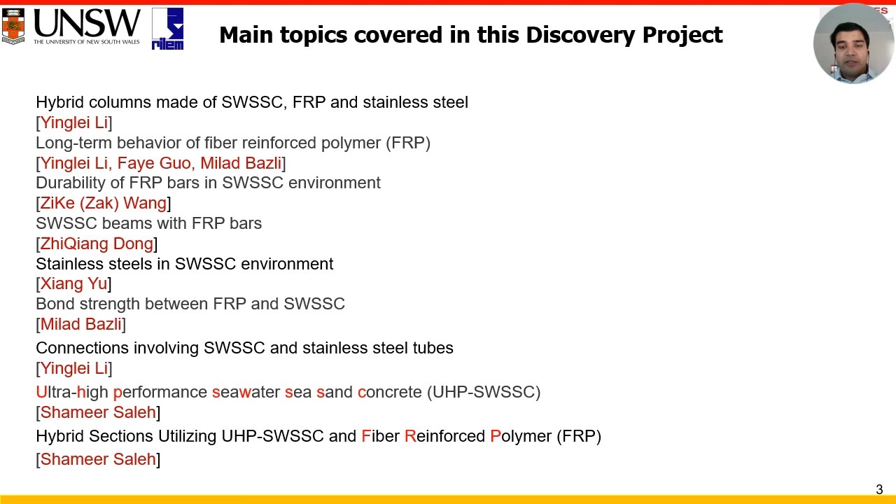There are several main topics covered within this discovery project. However, for today's presentation, I will be focusing on one of the two topics that I am covering within my PhD.

We all know that overproduction and overuse of OPC concrete can lead to scarcity of natural resources such as fine aggregates, freshwater, natural coarse aggregates, and also can be a significant source of carbon dioxide emission. Global cement production in 2021 all over the world was 4.4 billion metric tons, which was more than 3 times than it was in 1995.

At the same time, industrial byproducts such as slag and silica fume are hazardous in nature and they need to be managed properly.

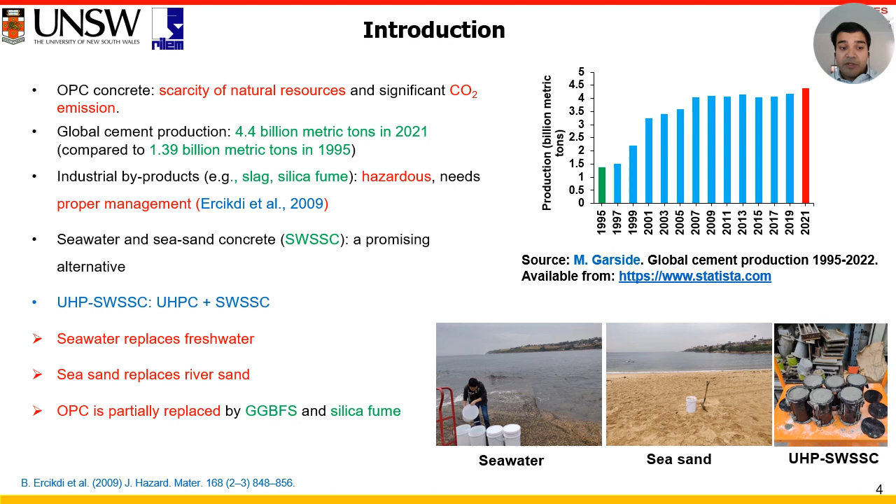Different literatures have established seawater and sea sand concrete as a promising alternative to conventional concrete. In my PhD, I am trying to incorporate marine resources in ultra high performance concrete production. This means seawater will replace freshwater, sea sand will replace river sand, and OPC will be partially replaced by slag and silica.

So the aims of this research are to develop a proper mix of industrial byproduct based low carbon ultra high performance seawater sea sand concrete, which will have the desired physical, mechanical, transport and durability, and also chloride binding properties. And in the second part, I will be trying to incorporate this special type of concrete into FRP based hybrid and composite structures.

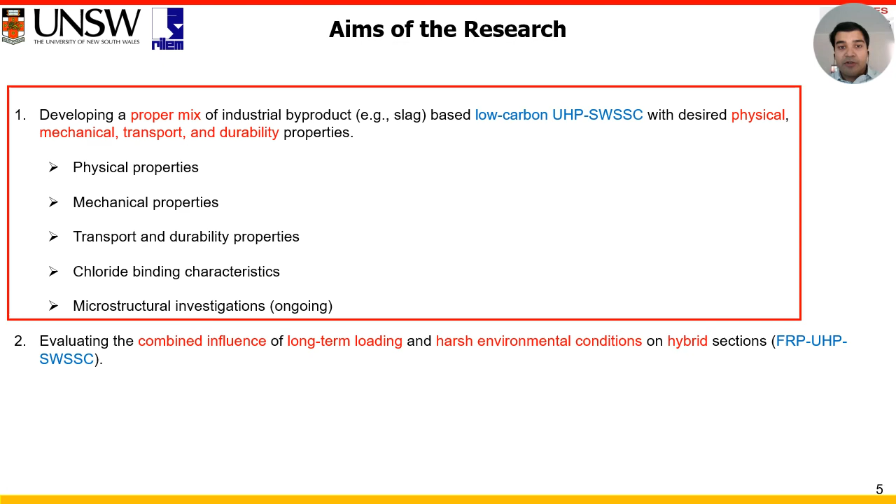I will be evaluating the combined influence of long-term loading and harsh marine exposure conditions to these type of structures. However, for this presentation, I will only be focusing on the first aim of my PhD research.

So, we have developed several mixes in the lab, the parameters being replacement of OPC up to 62.5% by slag and silica fume, different sources of aggregate, and water to binder ratio. However, to keep things simpler, in this presentation, we will only evaluate 4 mixes.

3 of them are seawater sea sand ultra high performance concrete. Number 1, 100% OPC based control mix. Number 2, OPC and slag based binary mix. Number 3, OPC slag silica fume based ternary mix.

And for comparison purposes, we will also discuss one conventional ultra high performance mix that is developed from natural water and natural river sand.

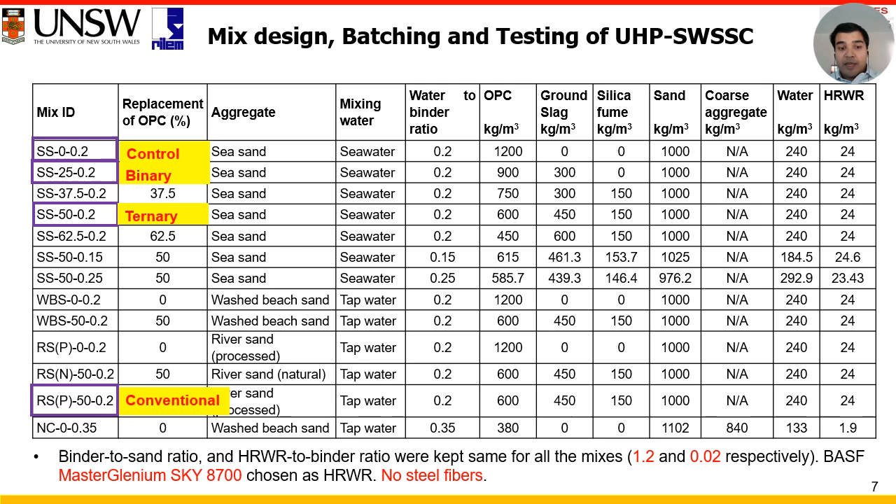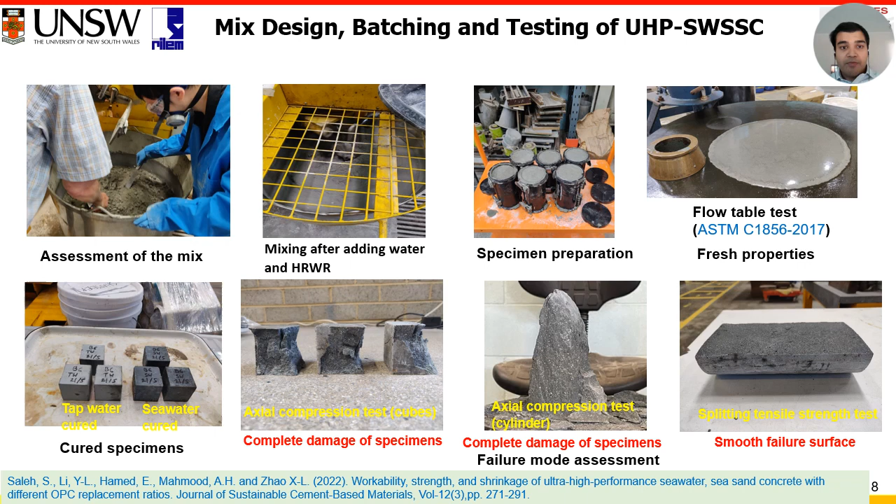Now the effects on the compressive strength. We have found that addition of SCMs can significantly lower the early age strength up to 3 days. However, after 28 days and beyond, the long-term strength will surpass the control strength. This is primarily because of the high pozzolanic reactivity nature of silica fume and its filler effect, which will improve the particle packing density.

When seawater was used in mixing, it had a positive effect, especially in the early age. However, when the concrete specimens were exposed to seawater for a long time, it had some negative effect.

This is because the high chloride content in seawater can accelerate the hydration reaction, especially in the early age of concrete. It can block the concrete pores and increases the initial strength gain.

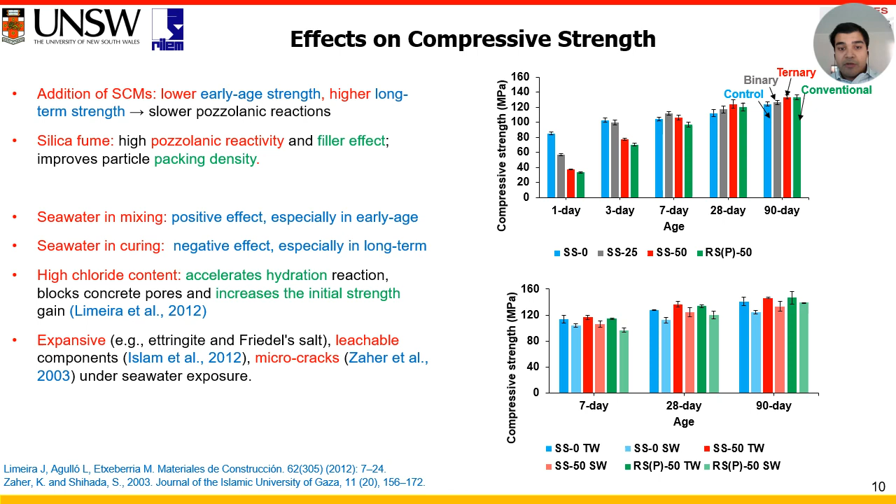However, when concrete is exposed to seawater for a long time, expansive and leachable components form, and also it can create micro cracks on the concrete which can deteriorate the compressive strengths over the long term.

To complement our mechanical test, we performed heat of hydration test and found that seawater indeed accelerates the cement hydration. Use of seawater not only increases the heat flow but also the acceleration peak has been shifted by 6 to 8 hours, which is an indication that seawater accelerates the pozzolanic reaction.

At the same time, use of over 50% SCM can significantly increase the cumulative heat, especially because of the filler effect and production of extra nucleation sites.

However, it was interesting to see that the seawater generated mixes produced more heat in between 12 to 30 hours. However, after 72 hours, the seawater mixed concrete produced lesser heat compared to the controlled tap water based mix, which indicates the early age strength improvement of seawater and the later age strength decrease by using seawater.

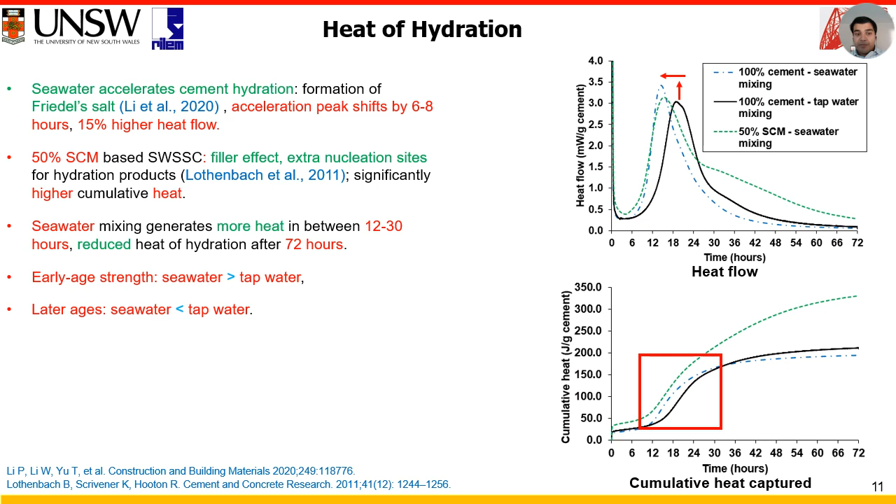Next, moving on to the transportation properties, we have found that the effects of SCMs were prominent in water absorption and volume of permeable void tests, as SCMs produce more CSH, which means more refinement to the pore structure.

However, it was also found that use of only slag does not significantly enhance the transport properties, probably because of their slower pozzolanic reactions.

When marine UHPC was compared to conventional UHPC, we found that marine UHPC generated superior transport properties at earlier age, however slightly inferior after long term, which is because the calcium chloride present in seawater can accelerate the early age hydration.

And after long term exposure in seawater, it can reduce the polymerization of CSH and thereby degrading the transportation properties. Also, the AFM phases within the concrete can bind with the free chloride and form Friedel salt, which can physically block the pores, which we will discuss in detail later.

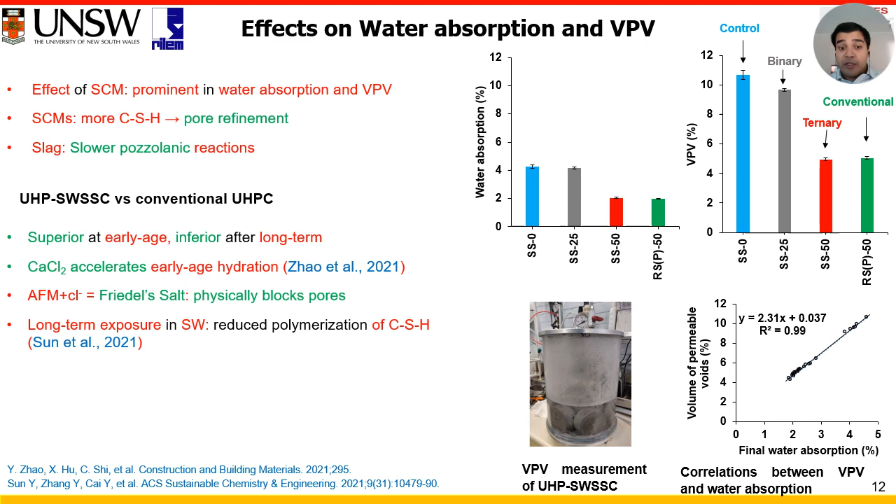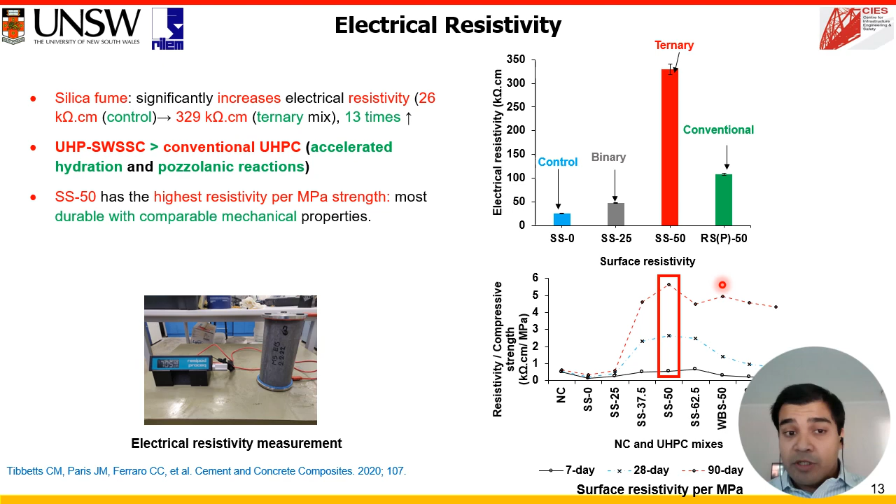We evaluated the resistivity per megapascal compressive strength and found that 50% substitution of OPC by SCM in marine UHPC produces the highest resistivity per megapascal compressive strength, meaning this is the most durable concrete with comparable mechanical properties.

Now, an important part for marine concrete is the chloride migration into it, and we found that the utilization of slag and silica fume in the ternary marine UHPC significantly improves the chloride penetration resistance. Compared to conventional UHPC, the chloride penetration resistance of marine UHPC is much higher.

We can also see this from the rapid chloride migration test that almost three-quarters of the depth has been penetrated by chloride in the control mix, whereas in the 50% SCM based ternary mix we barely see any chloride front.

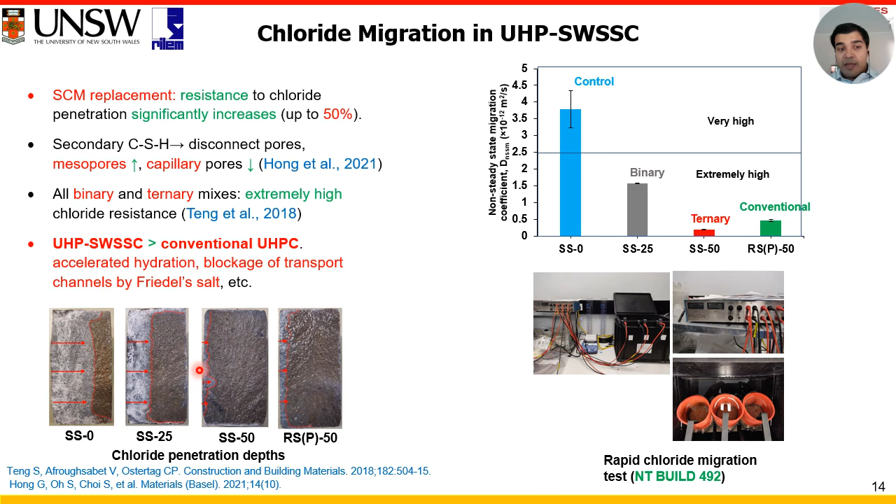Now, moving on to chloride binding, we know that chloride in concrete can be bound in two major ways: one is the chemical binding by formation of Friedel salt, and another is the physical adsorption within the hydration products.

Now, in our concrete, we have two types of chloride. One is already available from the mixing seawater and sea sand, called the internally available chloride.

We found that internal chloride binding capacity was highest in the OPC slag binary mix, followed by the control mix, and lowest in the silica fume based ternary mix, which is corroborated by literature suggesting slag can increase chloride binding capacity. However, inclusion of silica fume can significantly decrease chloride binding, but as silica fume produces more secondary CSH, there is a chance that physical binding can improve.

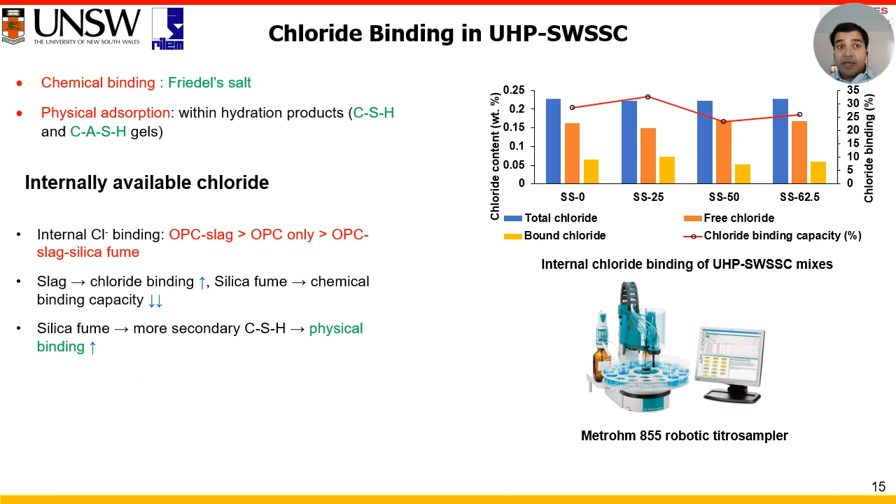So we evaluated the chloride profiles of all types of mixes and found that marine UHPC and conventional UHPC provide very similar and comparable chloride profiles, and the binding capacities of external chloride from marine environment exposure fall within a narrow range of 30 to 36% for all mix types. This means that although we used silica fume, it did not significantly reduce the external chloride binding capacity, suggesting that physical binding governs within the microstructure in our mixes.

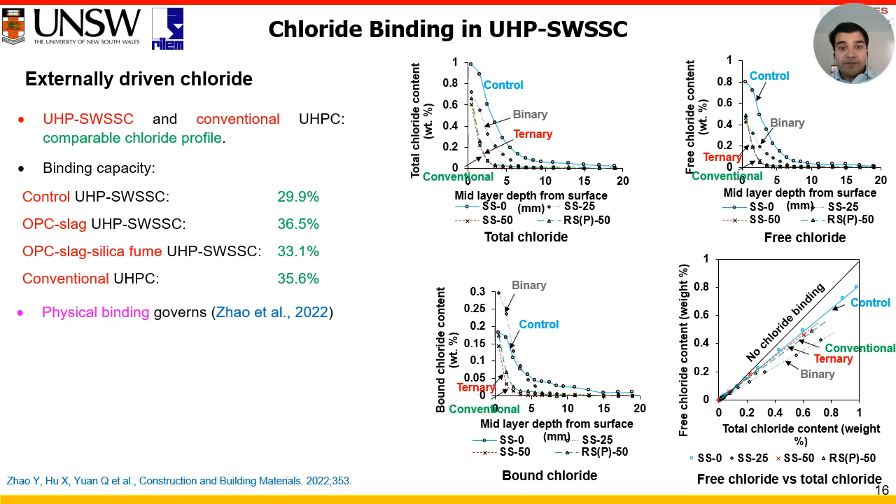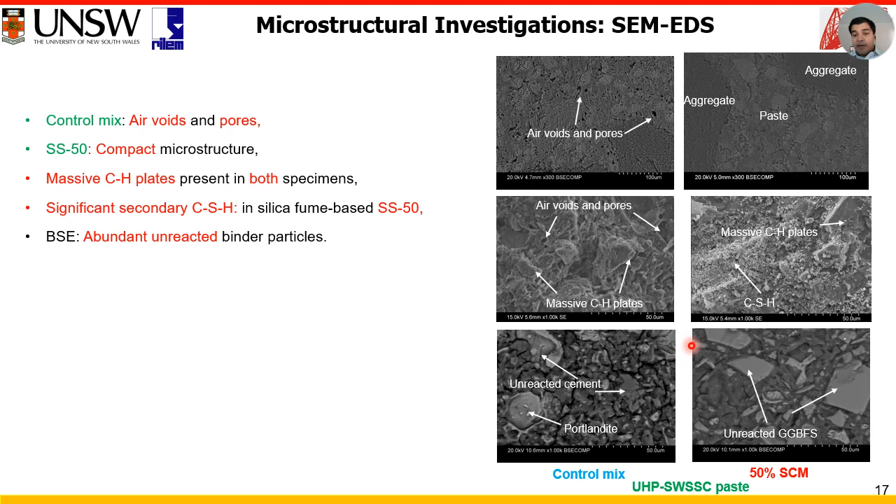From the microstructural characterization, we found that the 50% SCM based ternary mix produces a much more compact microstructure without any visible pores compared to the control. We could see abundance of CSH gels, and also the unhydrated binder particles were abundant within the microstructure.

From XRD analysis, we found that Portlandite has significantly reduced in the ternary mixes compared to control, and we also saw that the monocarboaluminates in the OPC slag based mix were diminished. This is why adding only slag will not provide significant improvement in transport properties, emphasizing the importance of adding silica fume in this type of marine ultra high performance concrete.

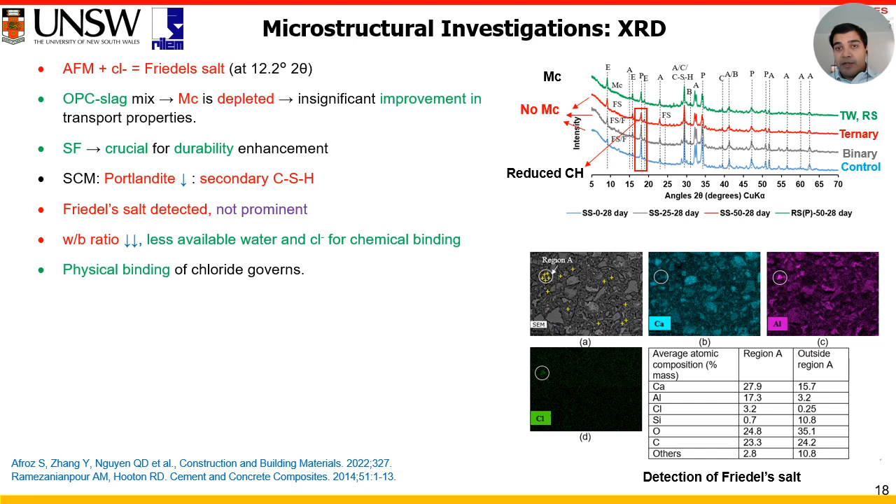We detected Friedel salt, however the peaks were not prominent, and from EDS mapping, in some rare instances we located regions rich in Friedel salt. We concluded that as the water to binder ratio is very low, the available water and thus available chloride for chemical binding is also significantly less, indicating that physical binding of chloride has governed in this type of concrete.

Now we come to the carbon footprint intensity and saw that utilizing supplementary cementitious materials can significantly reduce the carbon footprint. The carbon footprint intensity in the marine UHPC can be as much as 25% lesser than the conventional UHPC, mainly because of the absence of steel fibers. We do not have any steel fibers in our mix to avoid corrosion chances.

Now when we compare the carbon intensity to produce per megapascal concrete strength, we saw some impressive results: with the utilization of SCMs, the carbon footprint per megapascal of strength will reduce.

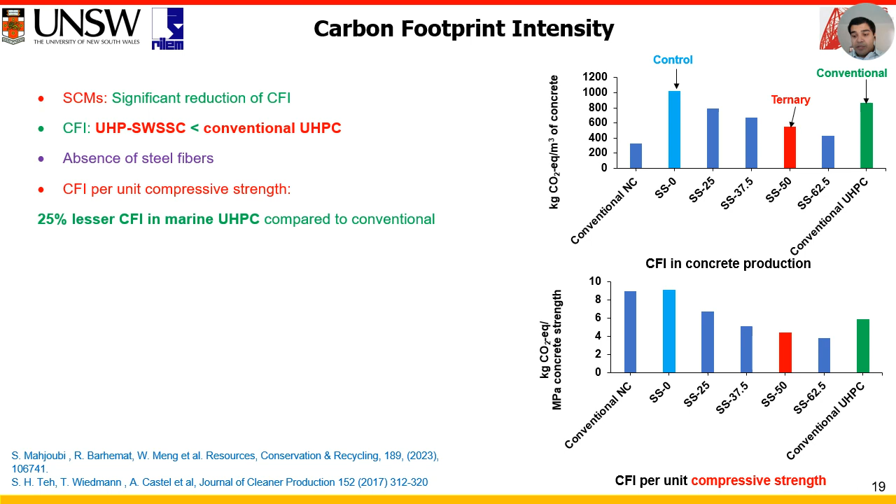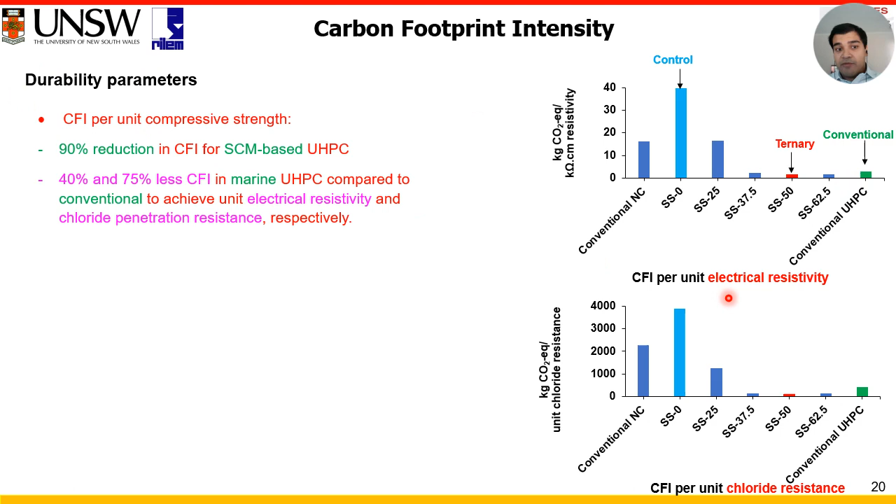If we compare the carbon footprint per unit durability, the results are amazing. We can see that the ternary mixes can save up to 90% of carbon dioxide production compared to the control mix, and 40 to 75% less carbon footprint intensity compared to the conventional UHPC mix.

So in conclusion, we can see that industrial byproduct based SCMs can improve mechanical properties slightly, but can significantly enhance transport and durability properties. Friedel salt can densify the microstructure by physically blocking the capillary pores.

Internal chloride binding is not significantly affected by the SCMs, and in terms of external chloride binding, the marine UHPC and conventional UHPC are very similar. Also, physical chloride binding seems to govern.

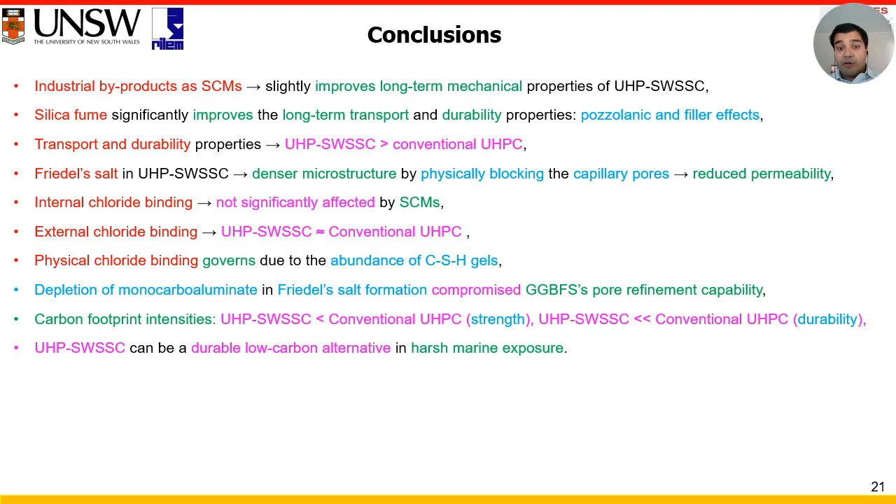Monocarboaluminate depletes and thus compromises the slag's pore refinement capability. Also, in terms of carbon footprint intensity, marine UHPC is a lot better than conventional UHPC. So we can say that marine UHPC can be a durable, low carbon alternative compared to conventional UHPC.